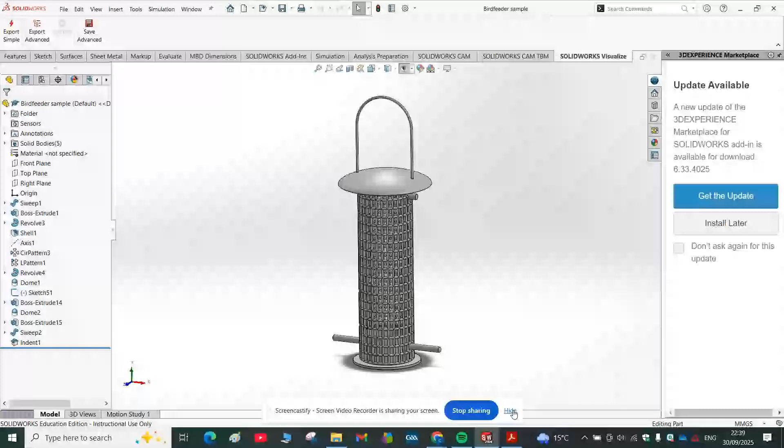Hi lads, so what we're going to do today is we're going to draw a bird feeder similar to this one. It's one that I got from Amazon.

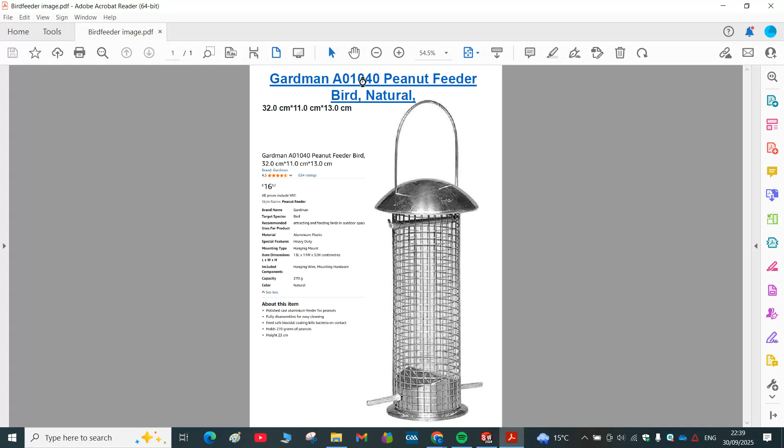What I like to do is just put stuff together because Amazon gives you a lot of measurements. So I just created this little document here. I just snipped out a few pages, but what I did as well is I just put in a link here. So if I want to get information, Amazon is great because it gives you lots of details, particularly on sizes and so on. This particular one hadn't a huge amount of sizes, but still I was able to get enough to draw this.

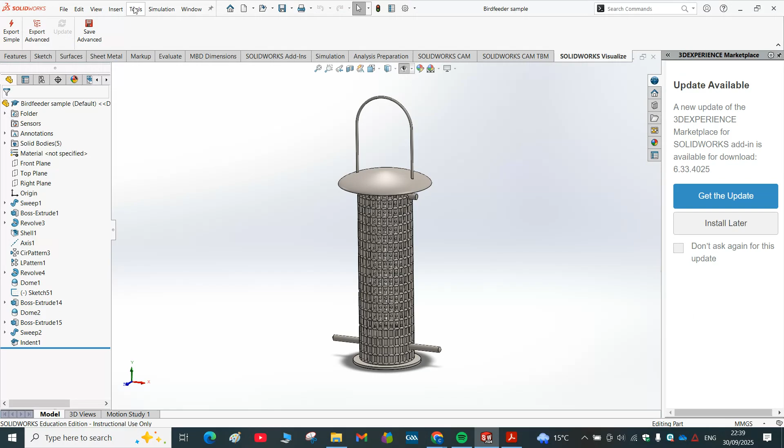Okay, so there they are. Now, SolidWorks is where I'm going to start with. So I'm going to go to a new part, up here to the sheet of paper, new part.

So I'm in a blank space now, and the first thing we need to do is give that a name. So we're going to go File, Save As, and I'm saving mine into a memory stick. You guys can save this into your documents, and I'm going to call this Birdfeeder Practice 1.

Okay, so it probably is a little bit complicated, this one, but we'll give it a go and see how we get on. So with the bird feeder, what I'm going to do is draw this base part here first, and then we'll draw the mesh, and then we'll put the top on after that. So we're going to use a few new features for this.

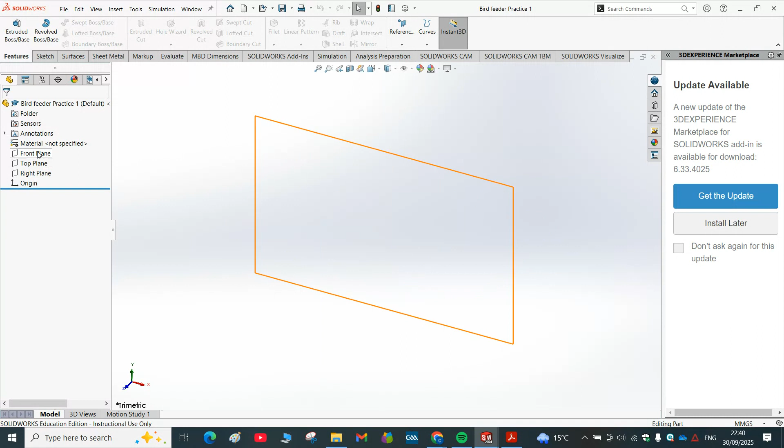So we're going to do mainly on the front plane, top plane, right plane, and I'm going to try and keep the origin in the very center of the cylinder. So front plane, open a sketch. I'm in a sketch because I have this icon here. I'm just going to close that off, and I'm going to go line.

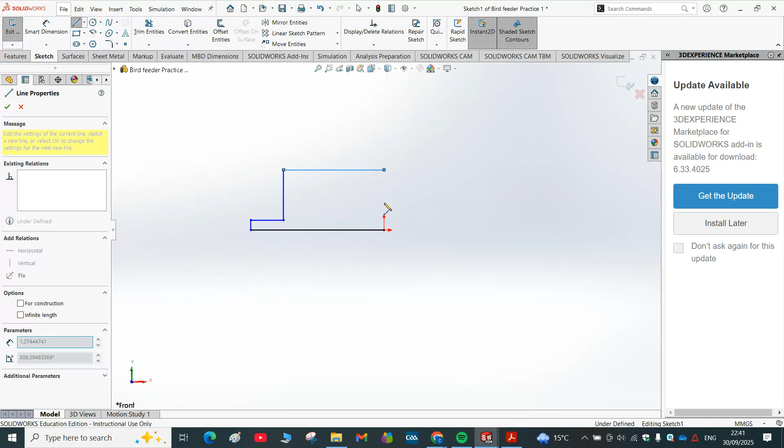I'm going to use a command called revolve. So I'm going to draw out a horizontal line, cross, up, cross, and back in here to meet. So it's very crude there, and what you're looking at is this base piece. You can see it a little bit sticking out.

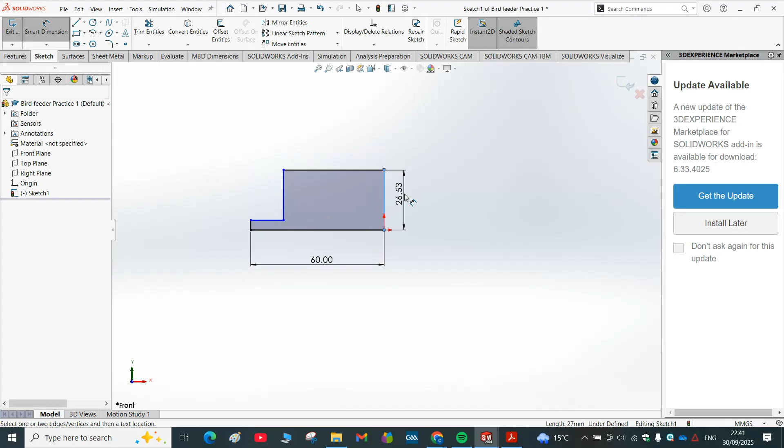All right, so the measurements I'm going to use for this are as follows. I'm going to go smart dimension, and I'm going to make this one here to be 60. I'm going to make the height here to be 50. I'm going to make this little step here to be 4. And I'm going to make that distance there to be 15.

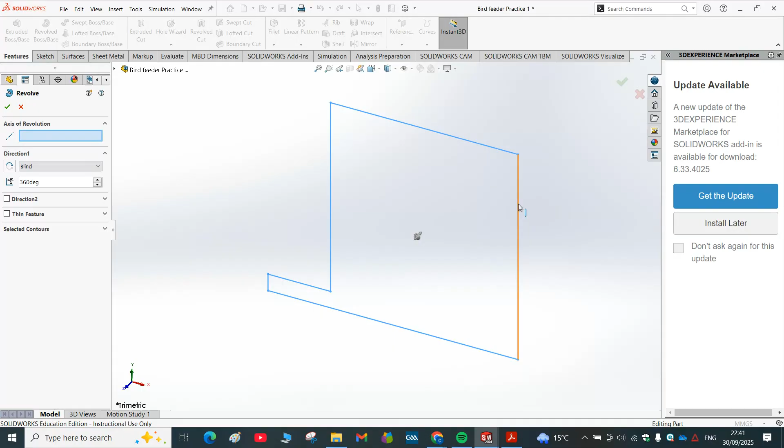Okay, so it's all gone black there, so I'm happy with that. I'm going to exit sketch, and go to features, and use a feature called revolve boss base. Revolve boss base needs an axis of revolution, so that's going to be this line here. And you can see now that it spins it around like that.

If it doesn't start doing it, you just basically select your sketches as your contour. Okay, so that's that much done there. Now that has to be hollowed out.

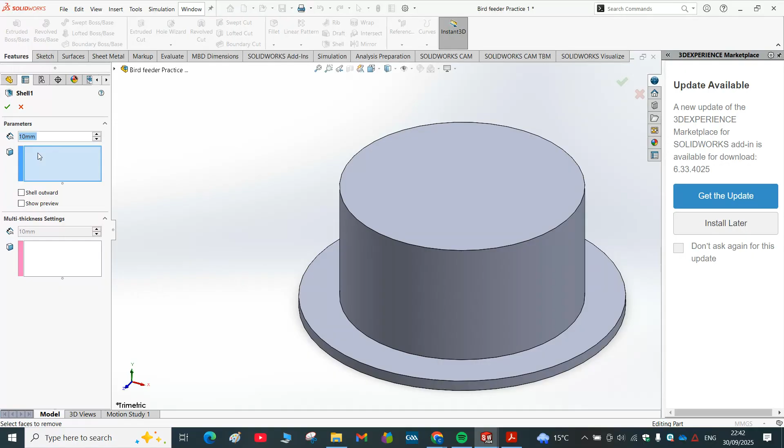So instead of me doing a cut extrude, I'm going to use a command called shell. Shell means like a box, make a box out of it. So I'm going to select the surface because I want to remove that surface, and the size of the wall I want to be left with is going to be 2 millimeters. So I'm going to select that there and press correct. So what that has done is made this wall here 2 millimeters in size for me.

So I now have the base done. Next I'm going to start on the mesh. So the mesh as well, I'm going to draw it on the front plane, and I'm going to go normal to. And what the mesh I'm going to do is do the rings first. I'm going to put on all them rings, and then I'm going to add the vertical pieces to it.

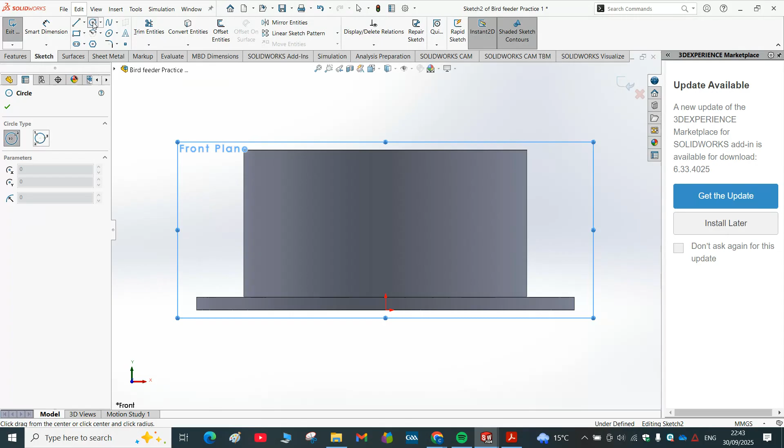So to do that, I'm normal to. I'm going to come up here. I'm in a sketch in the front plane. I'm going to come up here to circle, and I'm going to just draw a little circle here, anywhere at all for now. I'm going to smart dimension that there for it to be 4 millimeters. Now, this is what I want you to focus in on.

So I want you to click on the circumference of the circle, hold down Control on your keyboard, and select this line here, and make the circle and that line tangent. That means touching at one point. Press correct, and I'm also going to select the circumference of the circle again, select this edge here, and again make them tangent. Okay, so that circle now is in the corner.

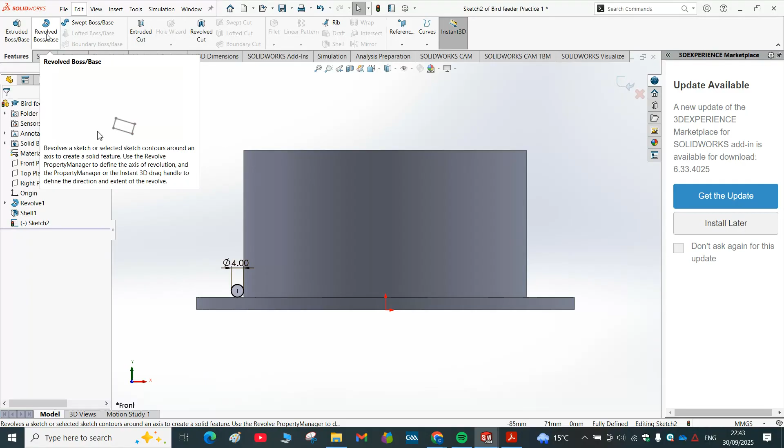It's touching that line, or tangential to that line, and tangential to that line. So my next feature I'm going to use now is revolve. Now, in this question, I need to have an axis of revolution. So I don't have one here at the moment, so what I'm going to do is X that for a moment.

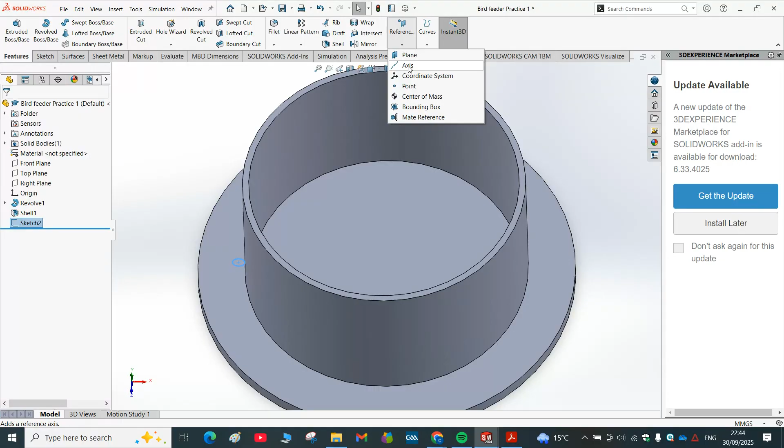I'm going to select the cylinder, be it inside or outside, and go up here to reference geometry, which will be under features. I'm going to hit that. Actually, apologies, I have to exit this sketch for a moment. Now, reference geometry, and what I do is click on axis. I select that cylinder, and what it gives me is a center axis up to that cylinder. I'm going to press correct.

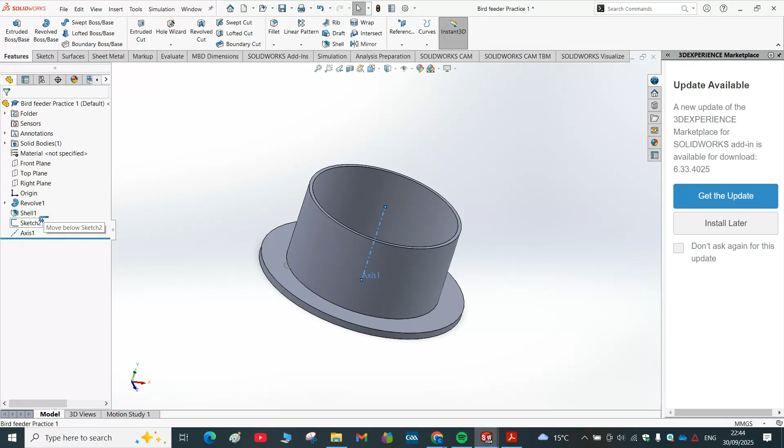Now, you may remember I had a sketch opened for this circle. I need to go back into that, for this one here. So I go to sketch 2 and edit sketch. And this time I'm actually going to have to do one small thing. I'm going to take this axis here and lift it up just above sketch 2. I'll explain why in a minute. It was done in the wrong order. Take 2, back into sketch 2, edit sketch.

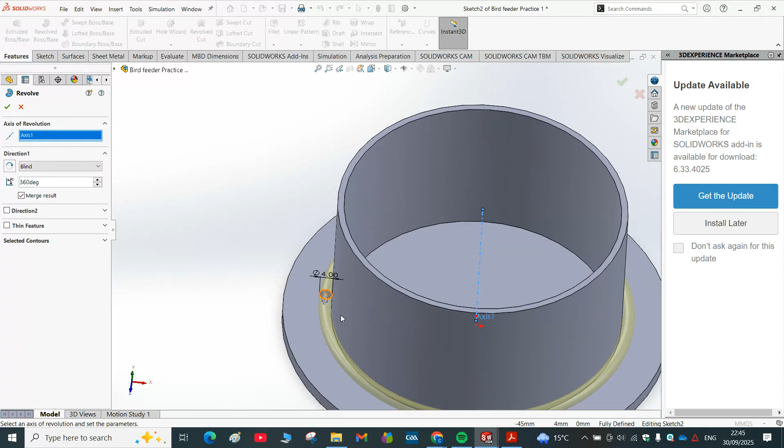Now I'm going to go to features and go to revolve boss base. Now what I need to do is give an axis of revolution for that circle, and this is the axis. If I hadn't moved that up higher, I wouldn't be able to select it. Okay, so what that does now is put a ring around it like that.

Now what I'm going to do here, lads, is I'm just going to deselect merge result, and press correct. Deselect merge result.

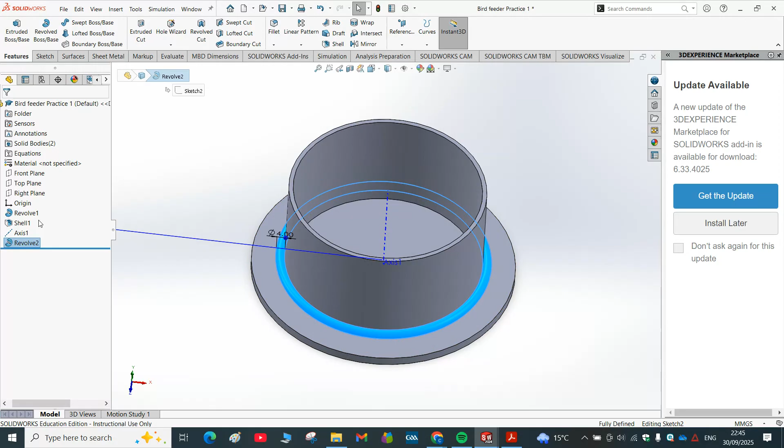Now, just let me come out there. So that put a ring all the way around. So when I did that revolve, I'll just open it again. I unselected that merge result, which means just keep it as a separate little ring. If you look up here now, there's 2 bodies. You have basically 2 little parts. So you can see now if I click that, I have the first part that I drew revolve, and I also have the ring.

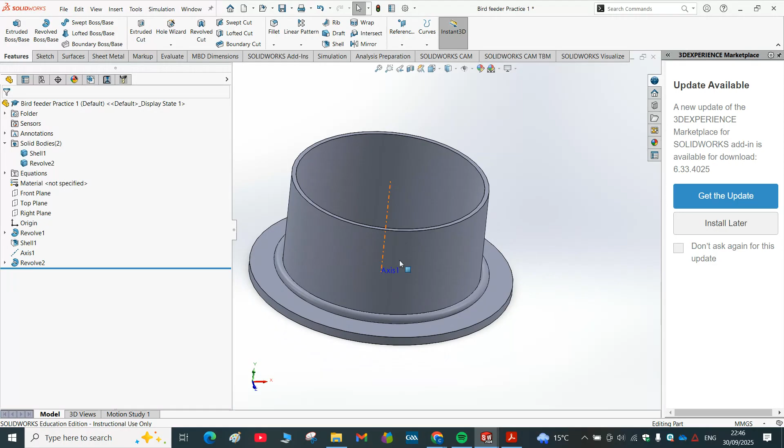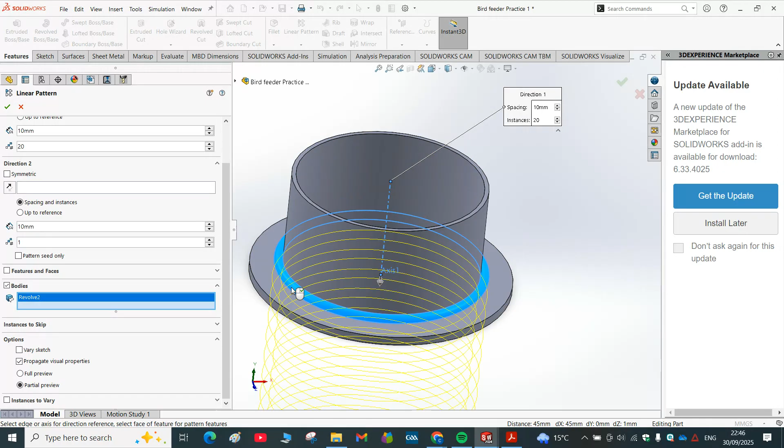Now, the next thing is I'm going to put in these rings. I'm going to come up here to a command called linear pattern. So I'm going to select linear pattern, and I want to select the direction 1 as the axis. And the body I want to do now, I come down here, I check the body, and I go up here, or actually I might be able to do it if I just select the ring. I am, so I just selected the ring, but it has to be in bodies. It'll automatically want to do it in features, but we have this as a body. And I come up here to get them to go to the direction. I reverse it. And the spacing I want is 21 millimeters, and I want there to be 21 of them.

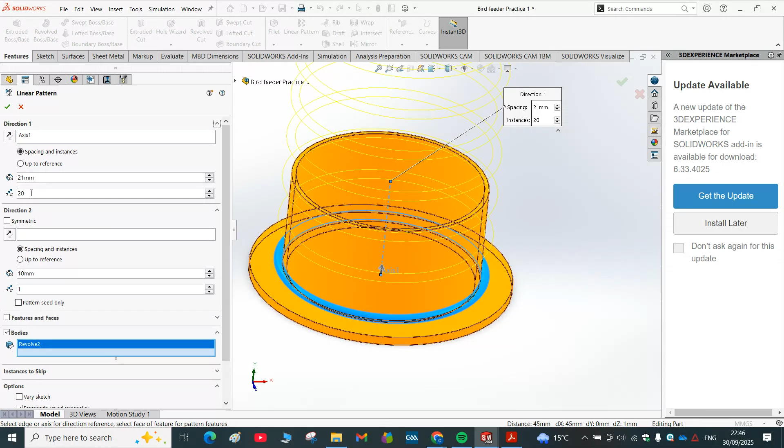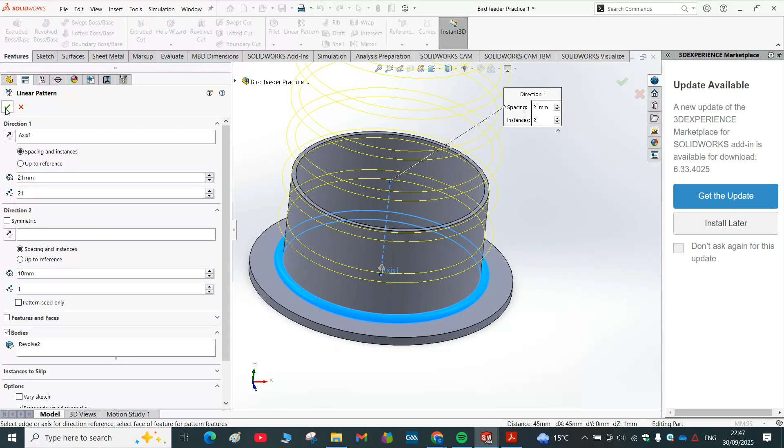Now, that just means the gaps between them will be 21 millimeters and there'll be 21 rings. So if I press correct here, it's not letting me do that. Sorry, that's where I checked that by accident, so that's what's wrong with that. And now that's done that there for me.

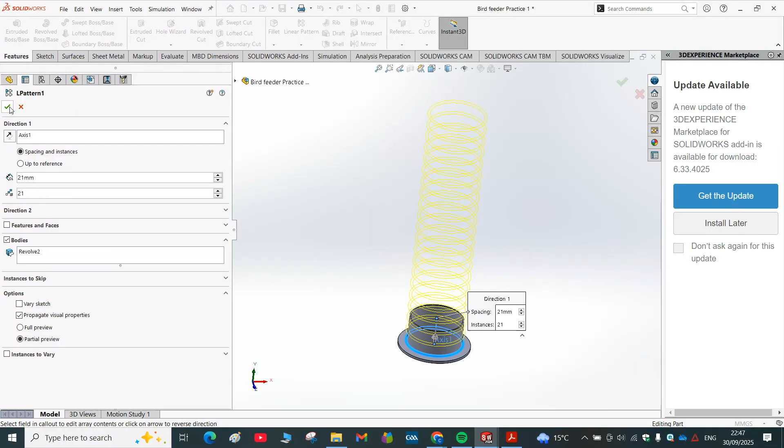So what happened was, I'll just go back and double check that with you again. In error, I took this one here up to reference when it should be spacing and instance. That means how much space do you want between each ring, and how many of them do you want from top to bottom. So that's mine there. So now I have all them rings in there like that, and they're all solid bodies. So what I might just do for a moment is get that and close it off.

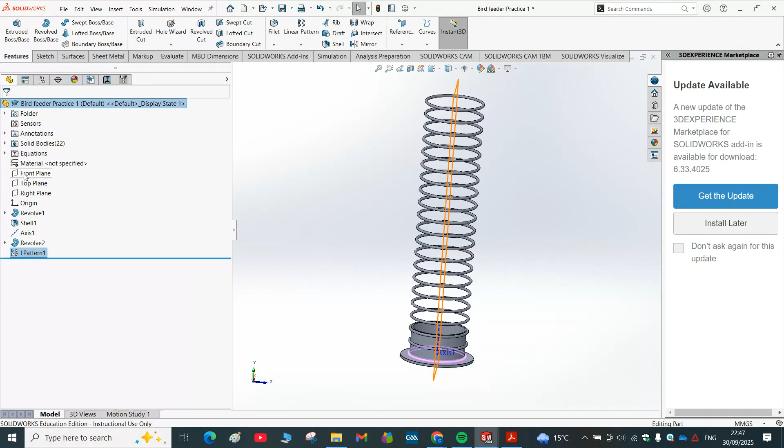All right, now we're going to put in the vertical lines next. So I'm going to come along here and go to the front plane again. Actually, no, I'm going to go to the top plane. I'm going to open a sketch. Here's my top plane. I won't actually go top plane there. I'll X that.

Okay, what I'm going to actually select is this surface here, because if I select the top plane, it goes on to the bottom. So I'm selecting that surface just in there.

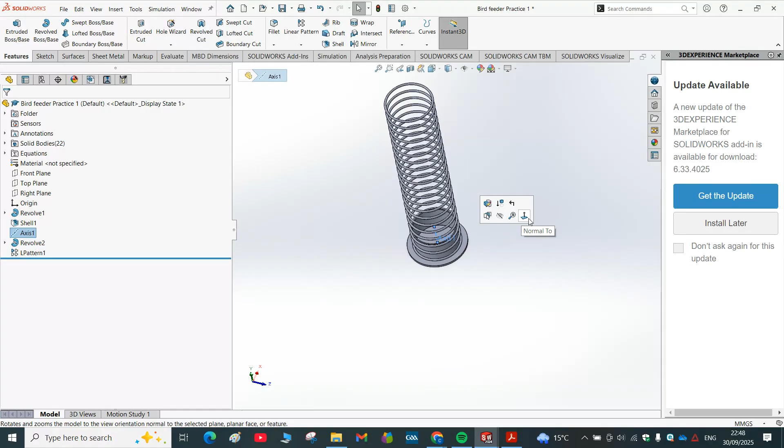Press save for a moment because it looks like the machine could crash. So I'm looking to select.

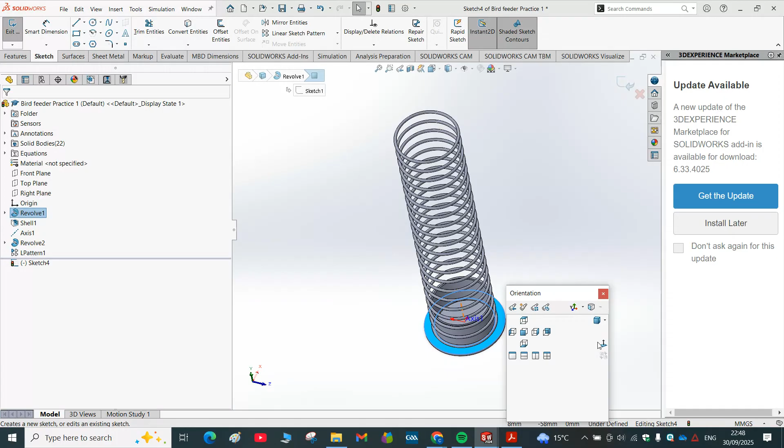Now, finally, let me open that. I think it's just my machine running a bit slow. So I select that surface and I create a sketch, and it should have come around normal to me, but it didn't. So there's my ring.

So what I want to do now is go to circle, and I'm going to draw a circle out here from the center point, and bring it out there. I'm just going to draw it any size for now. Okay, and that can move anywhere as well.

So I'll first of all give it a size, smart dimension. I'm going to make that 4. That's what all the rings are so far. I'm going to select that there, hold down control and the origin, select that. I'm going to make them horizontal, press correct.

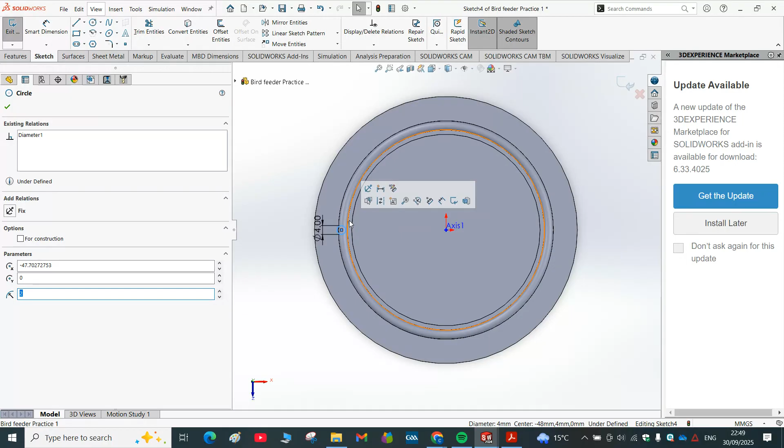And the next thing I'll do is bring it in, and try to select the circle and select this ring here and see can I make them tangent, and I can. Okay, so that puts it in position for me inside the ring.

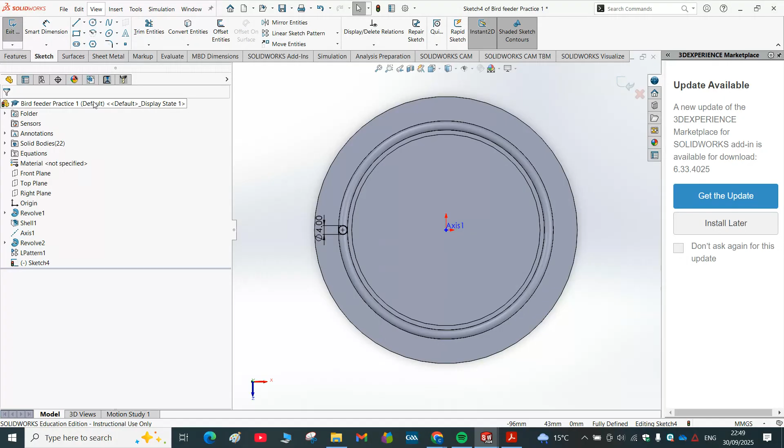So I made it 4mm diameter, held the center, selected the center point, held down control, selected the origin, made them horizontal, and then I selected the circumference and selected that ring, held down control, selected that ring and made them tangent. Now, so features, extrude boss base.

I'm just going to move that around and bring that up there, and I think I have to come up to about 300.

Okay, we're going to have to come up more than that, so we'll try more. So we go 400, a bit more again, 440 we'll try.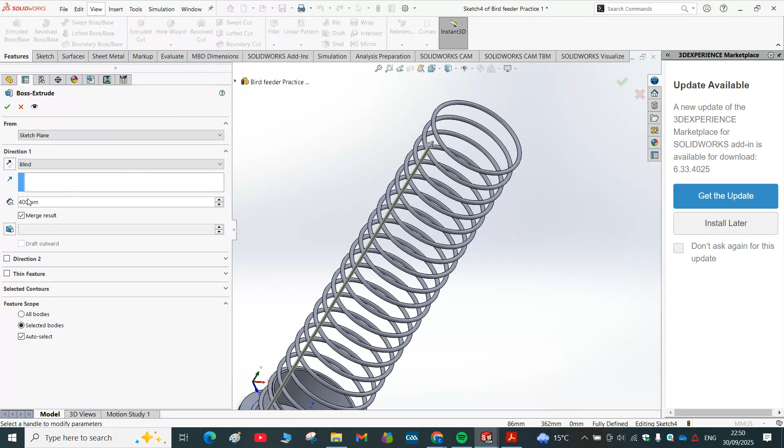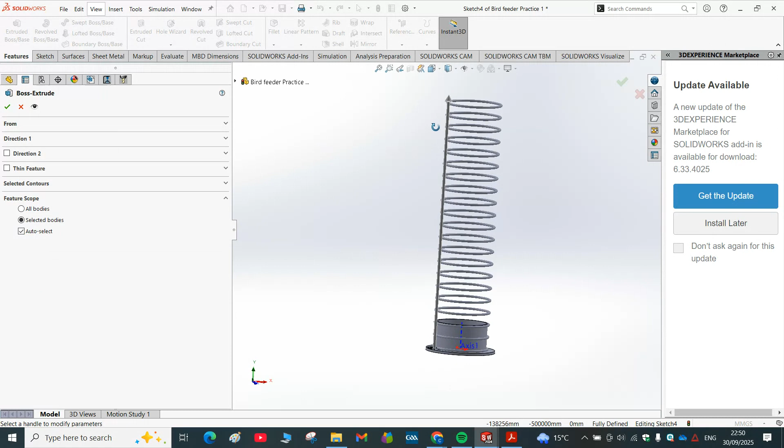Now I don't want to go on above the top ring there, so what I might do is go back there to 420. That's still a bit too high. See what 410 looks like. We'll go with that. Okay, so press correct there.

Sorry, and I know what I have to do here. I have to come back here, I'm just going to X that. I'm going to try it again. So I'm going there.

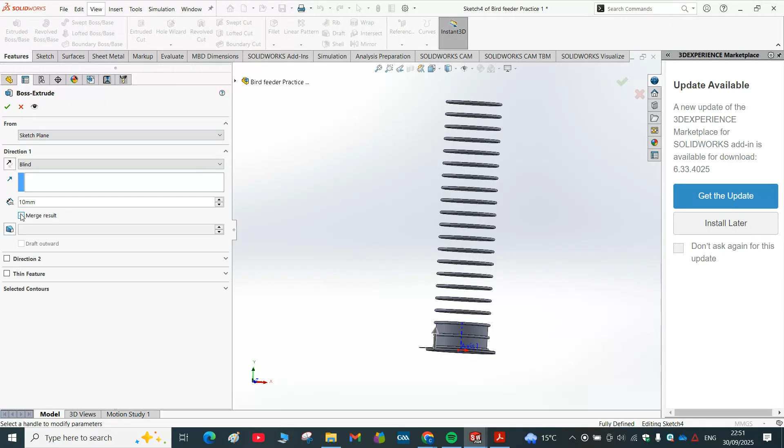Now I'm going to deselect merge result. Okay, and we're going to go up there to 410. And now I'm going to press correct. Okay, so now I have it there.

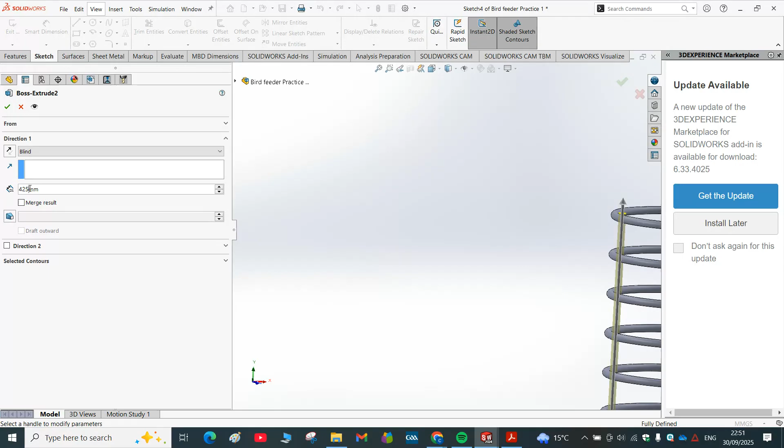Actually, it wasn't long enough. I'm going to go back and make that longer. So I'll make that 420. Make it a bit more, make it 425, so it's a nice even mesh. Ooh, that's a bit high. 422, perfect. I'm going to press correct there.

Okay, so now I've got one of them. So what I'm going to use now is another command up here. We used linear pattern a minute ago to do these horizontal rings. So I'm going to click the little arrow here, and go to circular pattern.

Now circular pattern basically will allow me to put them all the way around. So what I do is the direction is back to that axis that we had at the start. I am going to do 360, and there's going to be 30 of them. So I'm going to press correct, and I'm hoping that might work.

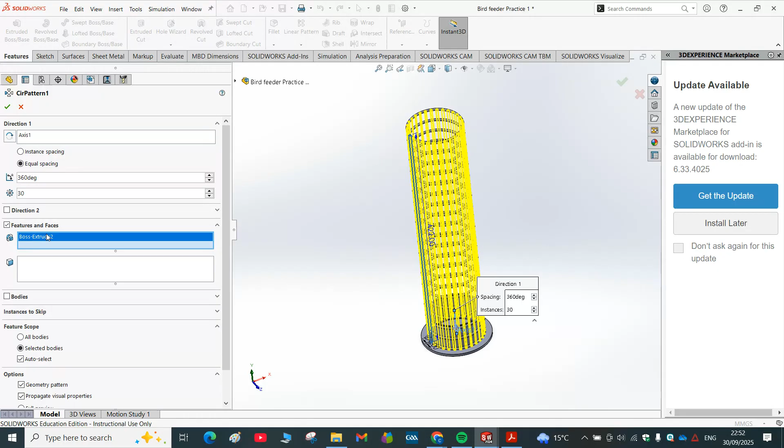No, okay, the reason that didn't work is because I need to do it as a body. So I'm going to select it there, and now it should bring them all the way around, and it does. Okay, so now I've created that mesh with my circular patterns. Just to go back into that circular pattern again.

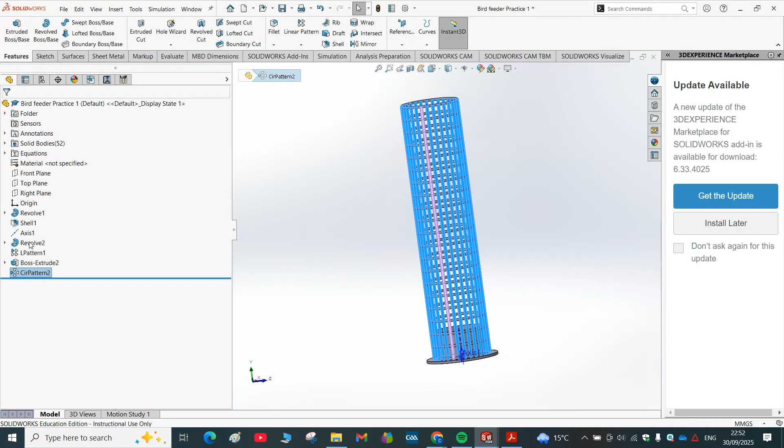So what you have is the axis in here. It has to be a body, not a feature. So the body can either come in and check it there, or you can come up to the folder here, go to bodies, and it was the last one down there, or you can just pick it up directly from this. There's 30 of them and it's 360 degrees.

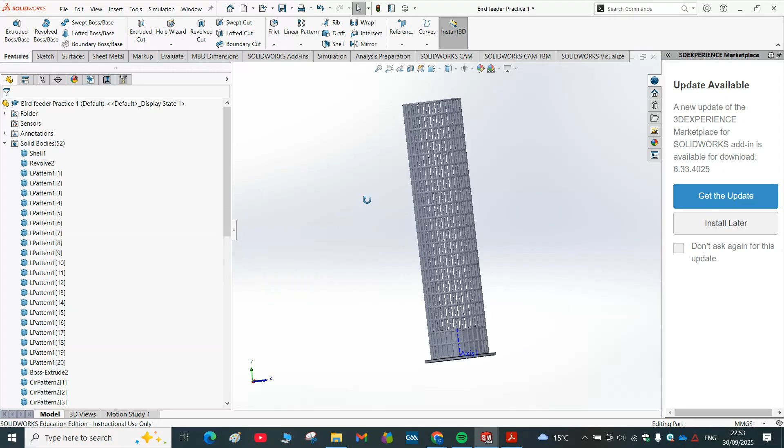Okay, so I'm happy with that. Now there's a bit of complicated geometry there, so I'm going to save that just in case the machine crashes. Okay, so we're as far as that now.

So my next job I'd like to do now is to try and put on this little perch here and this bar going across here, then after for the ring, for the holder and the lid. Okay, so back to SolidWorks here.

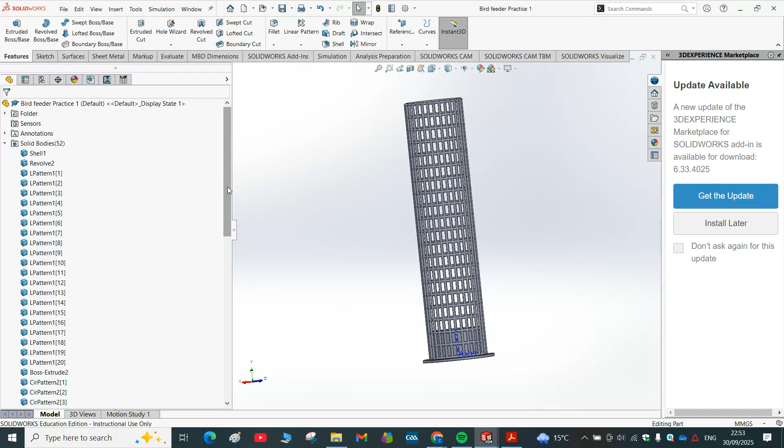So we're going to go to, this time we're going to go to front plane, sketch, normal to. Actually, sorry, I'm going to go right plane. So right plane, sketch, and is it normal to? It is, and I'm going to draw a circle.

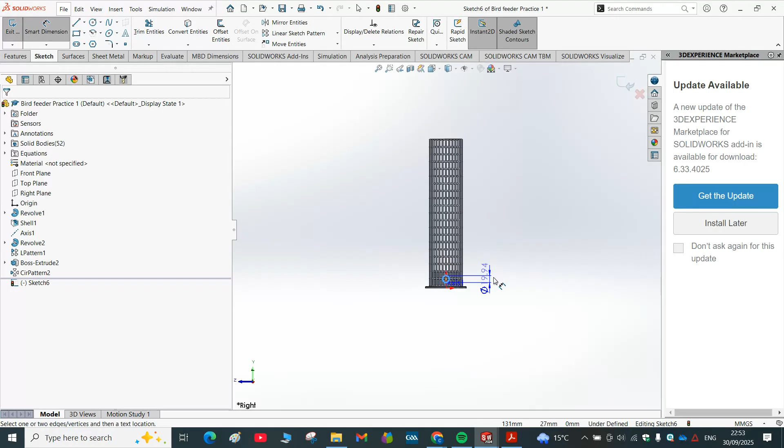Just put that circle there in the middle. I'm going to smart dimension that circle to be 10 millimeters. That's good. Not worried about the upper height up and down, that's not a big important deal.

I'm going to go features, and instead of me going out there blind, I'm going to go mid-plane because it has to go out to each of them. And I think we'll make that one there about, see what 150 looks like. Might go a little bit bigger. We might go...

160. Okay. Doesn't matter if you press correct there and it doesn't do it, just deselect merge result. I'm going to try it with merge result selected first. It didn't let me do it, so I'm going to deselect that, and now I'm going to press correct and it puts it in for me.

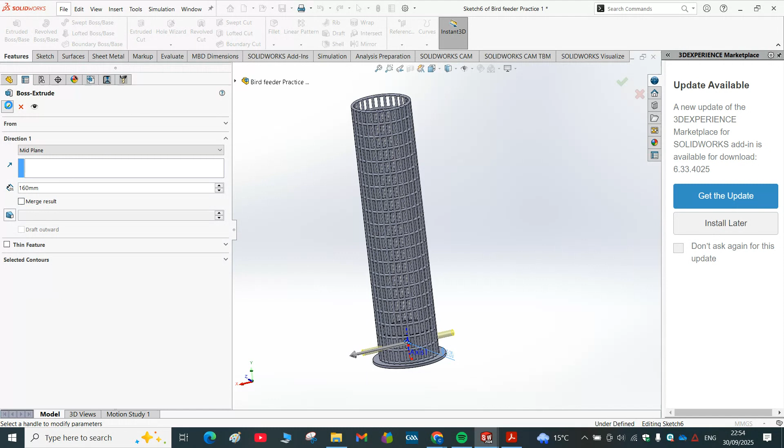Rather than leaving them sharp edges, we can come up here and use a command called dome, D-O-M-E. That has to be in there in black. If it's in one of these commands like features help, it won't do it. So check that arrow and select it as a command.

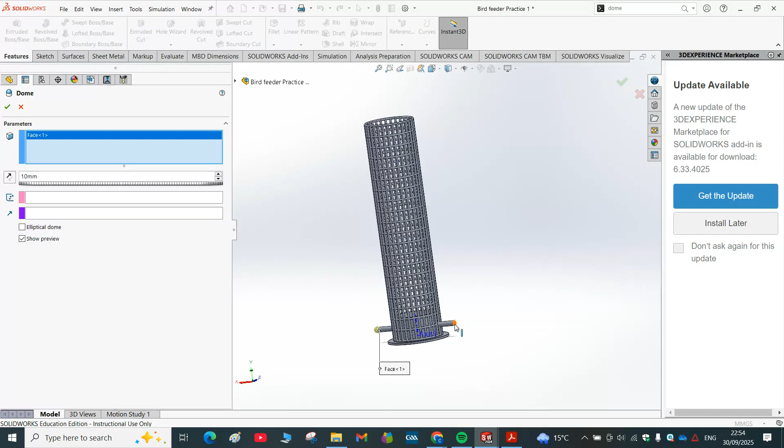So dome is there. I'm going to select the end there. And I'm going to select the end there. And it has to be the kind of face that you're selecting. So that one there. See, it's added in the circle.

Now I don't want them to be that big, so we'll go with maybe 4 millimeters there. See what that looks like. Okay, press correct. Okay, so see there's 4 millimeters there.

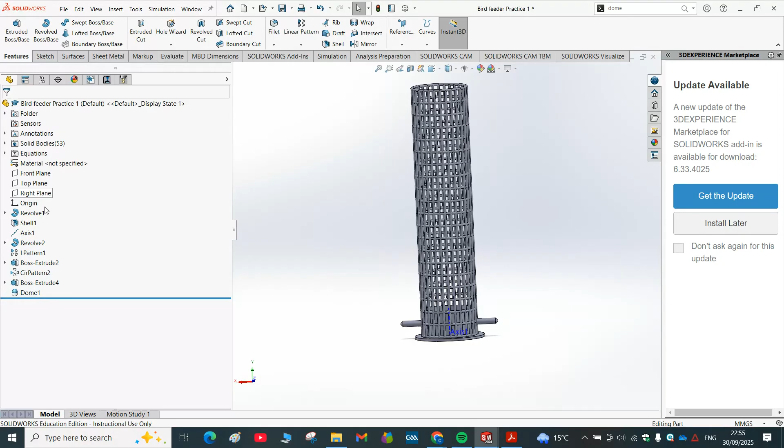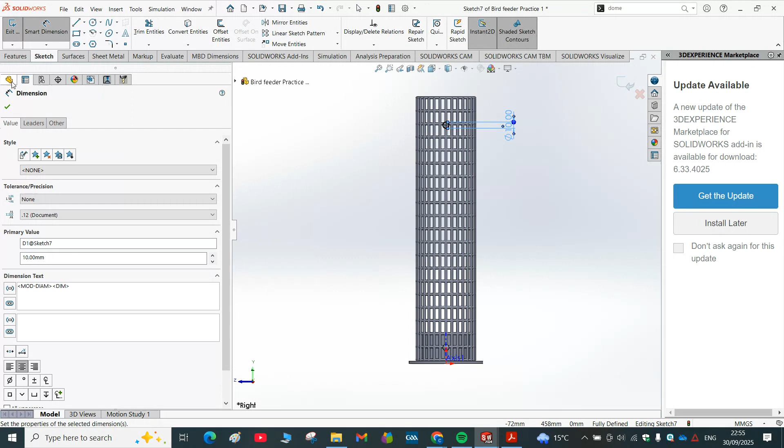Now, same idea there, I have to do a new sketch. So again, I want to go to right plane, sketch, normal to, come up here, pick up a circle, and we're going to let's put it around here. Doesn't matter that much, to be honest. So draw it there, smart dimension, and we'll put that at 10 millimeters as well. Press correct. We're going to go features, extrude boss base, and we leave the same setting as the last time.

Actually, we won't. We'll bring it in a small bit because if you look at this one here, it's slightly in a bit as well. So we'll go back and we'll knock off. Maybe we'll try with 140. What does 140 look like? We'll go less.

So we'll make that maybe 100. Bit more, we'll go 110. 120. Look, we're not worried too much about the measurements, just the look of it. Right, I'm happy with that.

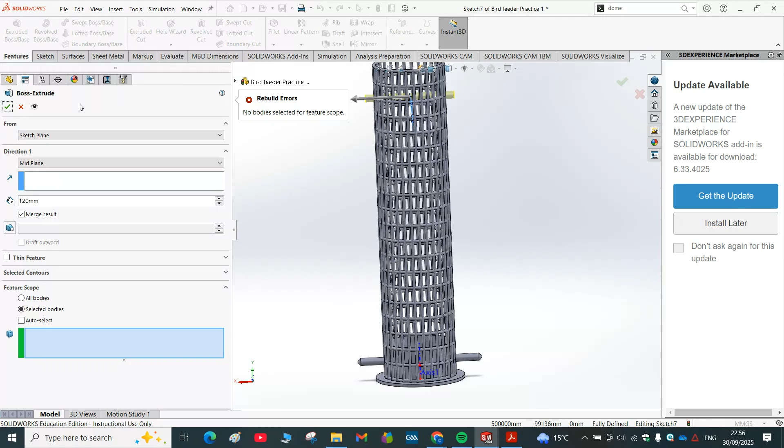Again, it won't let me do it, so I'll deselect that. And now it will. Okay, so that gets me the perch done.

The next job I'm going to do now is the actual lid, or the cover for it. So if you look at the cover, it's a dome shape there, okay, or you could say an elliptical shape. So the command I'm going to use for that is just something new.

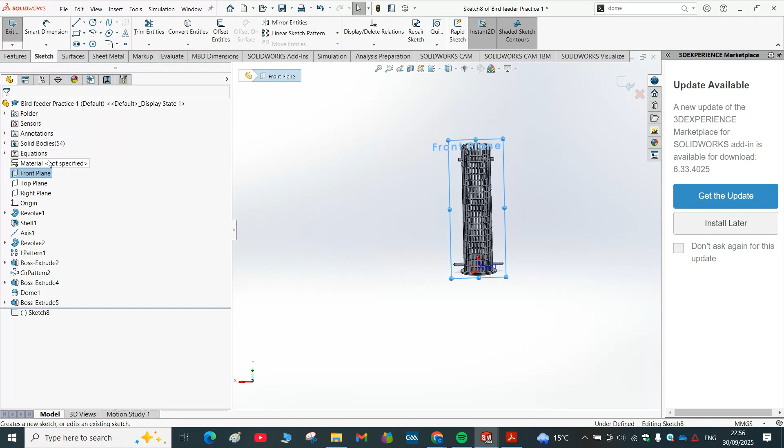So I'm going to go front plane, open a sketch, normal to, and I'm going to go line, very similar to the last one. I'm going to try and pick up the center. So see, there's the origin, it'll come up through it there. So I'm going to bring a line out there. Doesn't matter that far just yet.

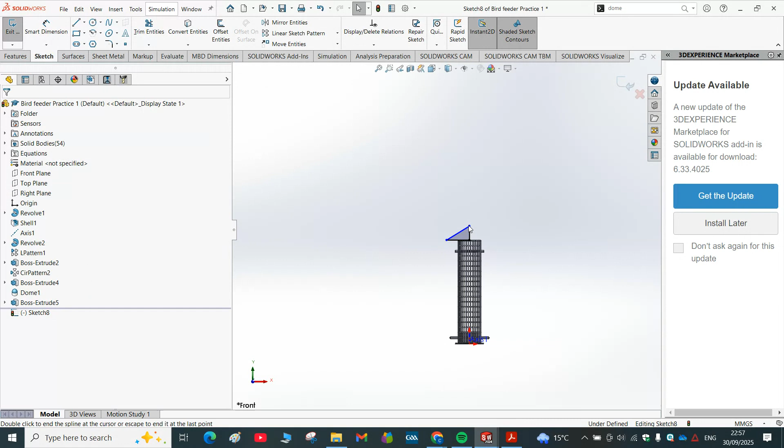I'm going to go up here to line again. I have to press escape, bring a line up here. And I'm going to use a command called a spline. So here's spline, so with spline, you just click there and click there. Now what I might just do first is I might put on a measurement, so I might smart dimension that there to be maybe 20.

Maybe a bit more, maybe 20, maybe 30. Okay, press correct. Yeah, that looks better.

So with splines, we want to make a curve. Select it there and you can see this little handle. I want to select that diamond and make it horizontal. Press correct. Select that spline again, this time check this diamond and make that vertical. Press correct. Now I basically pull that down like that, and bring that in as well. So that's what I created there.

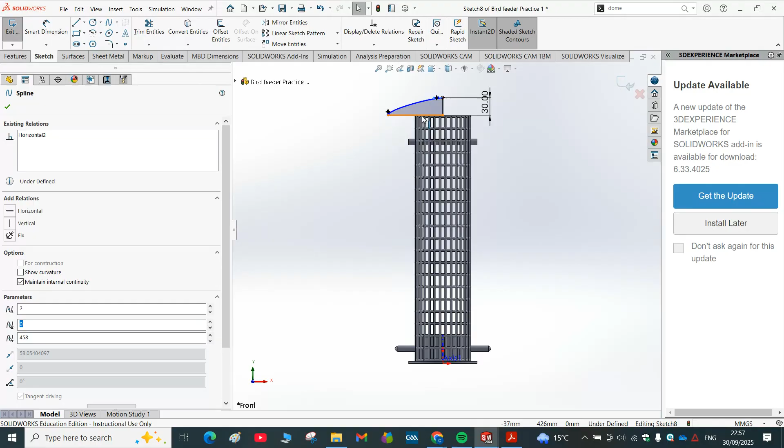Now back to my features, revolve boss base. This is the axis and it brings it around there.

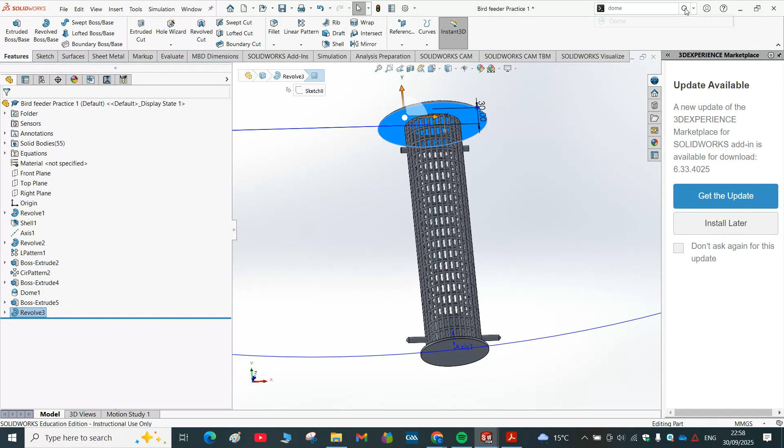Okay, nice. Now that's very flat. I don't want that to be flat, so I'm going to select that surface. I've already got dome here from the last time, so I'm going to dome that. At the moment it's coming, yours may be coming like this, where it's coming down the way. I'll exaggerate that a little bit. So let me see, that it's coming down the way. So we want it to go the other way and dome up into it.

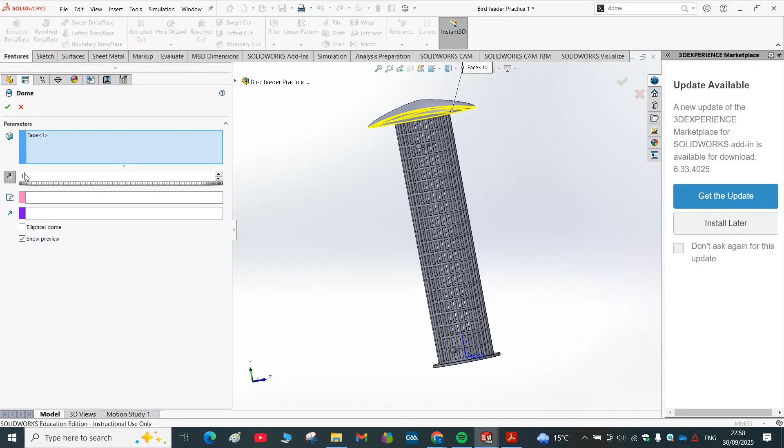14 is too big, we might just make that about maybe 10. Okay, you won't see it that much, but if I come up here and flick that, you can see that it's kind of domed up into it. It's not in contact, but that's fine, they're like that in real life as well. Okay, so that's my dome done.

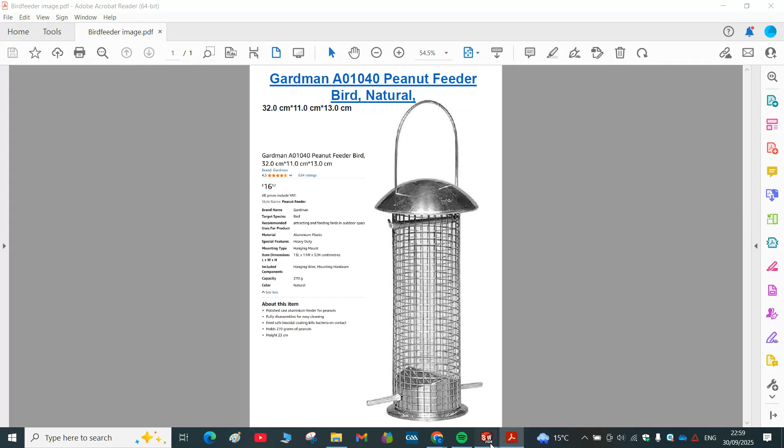Last job now is to put on this ring. So to do that, we are going to go to the front plane, open a sketch, normal spacebar normal to.

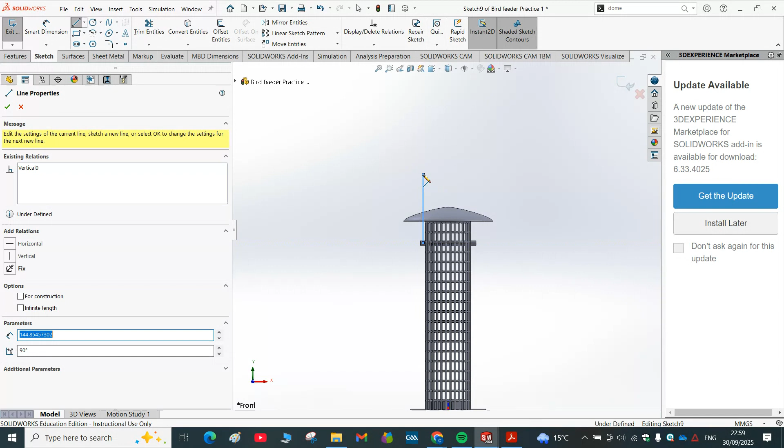So I'm going to go to line, start a line just roughly in the middle of that, bring it up to around there, press correct. I'm going to go circle, and try to get it picked up the middle for me there. I'm going to bring that across, come back here again, select line, and try to click it.

So that one, if you want to make them exactly horizontal, you can select that line, that dot I should say, hold down control, select that dot, make them horizontal, which means they are directly opposite each other.

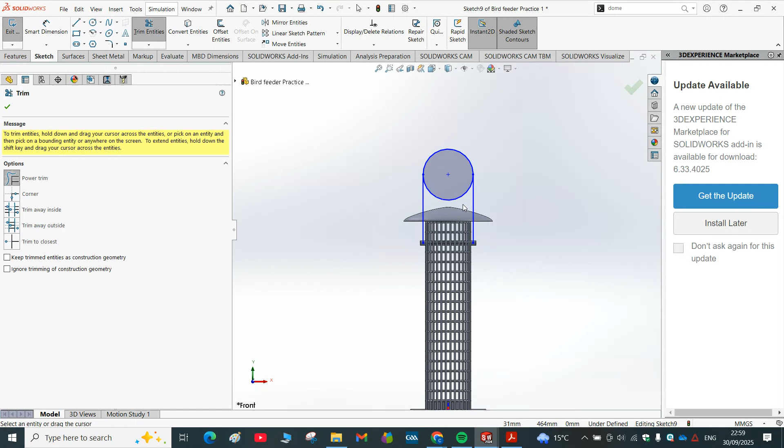Now what I need to do is change that shape. So I go up here to trim entities, power trim. What power trim does is you basically put the cursor here, hold down the left button and move it, and it just cuts away that part for me.

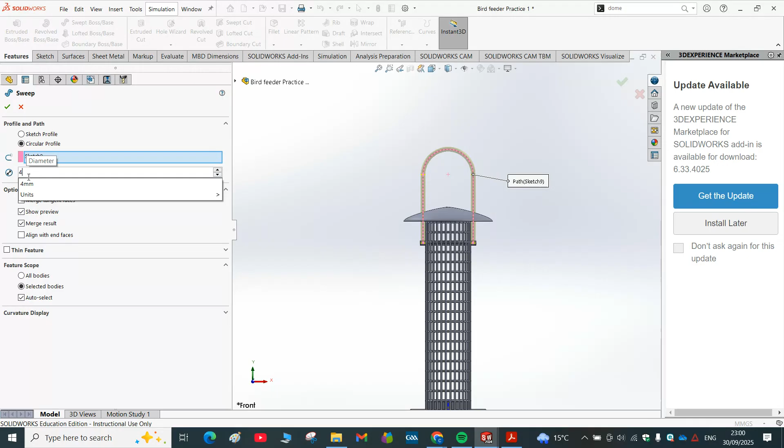Okay, correct. Last one, the same command we used before, which is sweep boss base. So we're going to go there, and go to circular profile, and select that. Now what it does is basically takes that shape and puts a circle around it, and I want that to be 4 millimeters to keep it all the same. So that's 4 millimeters, and I am happy with that. Actually, what I'm going to ask you to do there is deselect merge result, and I'll explain in a moment why that is. Press correct.

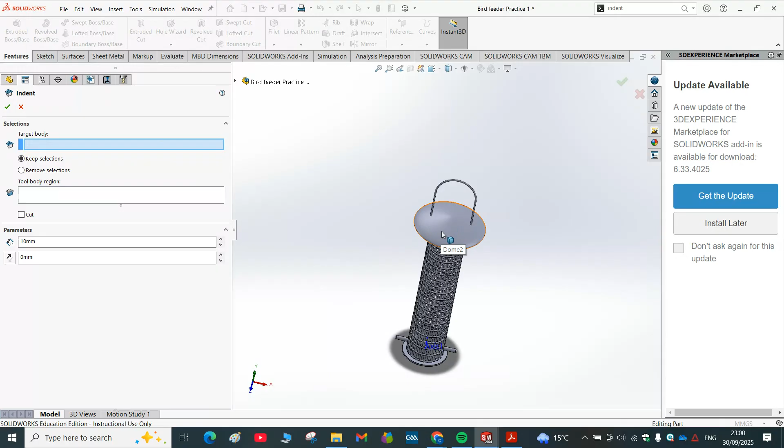Okay, now I want to create a hole through this lid that wire would normally go through. So I'm going to use a new command up here, it's called indent. If I select indent, what it wants to know is what do we want to cut. Now these have to be separate bodies to do that, so I select that. I want to enter the cutting, I want to cut that, put a hole in it. I want it to be cut. Okay, and I'm going to press correct.

Now it doesn't look any different, but if I just take this piece on its own and isolate it, what it has done is put the holes through that piece that the wire is going through it on. So that's basically what that is there.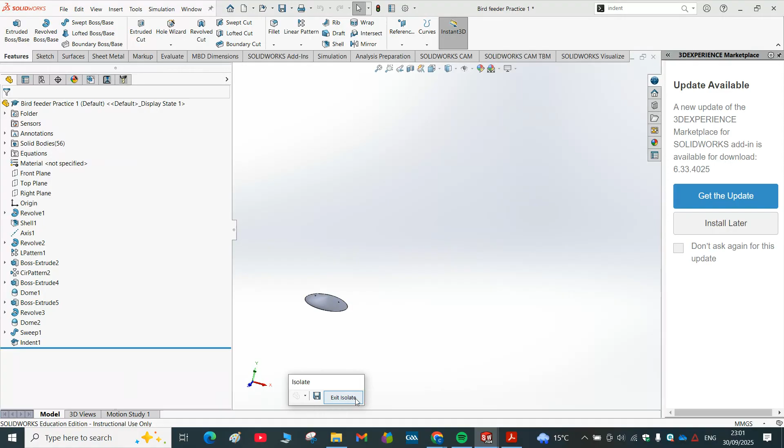I'm going to bring that there, bring it to isometric mode, and press save. And you can play around with whatever colors you want, so over here you can add different color to this part, and the mesh.

But that's basically our bird feeder done, and that's quite a complicated bird feeder. Look at all the little commands you've used all the way along there. So you could have done it probably simpler, but that's one way. So best of luck with that, and see how you get on with it.